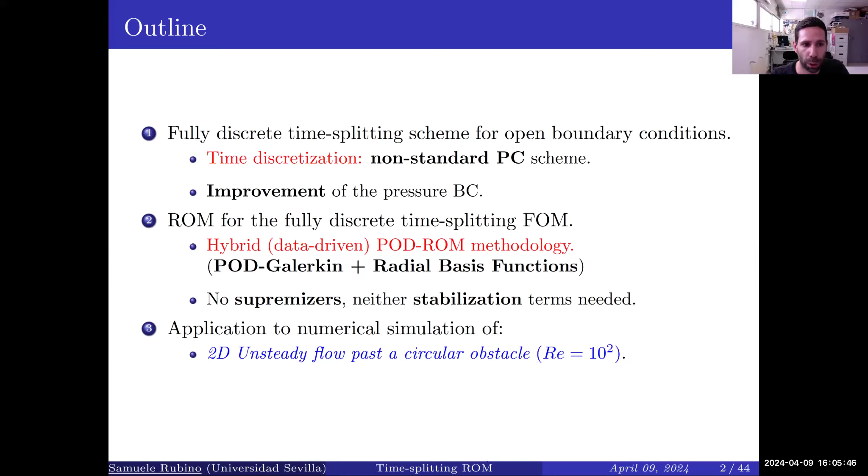We have, for instance, applications where we have the airflow around wind turbines and so on. And we will see how we get a really good computationally efficient algorithm by doing both time splitting at the full order model, in order to compute all the snapshots required in the offline phase, and also we will exploit basically then the computational efficiency with the reduced order model.

So here is the contents of the talk, and we start actually by giving a brief description of the Navier-Stokes equation model problem we are going to consider.

Let's consider omega as our bounded domain in dimension 2 or 3, with gamma, which is a Lipschitz boundary, and we are going to split it into two parts: a part in which we are imposing, let's say, inlet boundary condition, or where we are considering basically the wall of the domain, which is gamma D, where we actually impose Dirichlet condition, and the other part, which is gamma N, which is the one where we consider the open boundary condition. So you can see the incompressible Navier-Stokes equations with this mixed boundary condition, where as usual, U is the velocity field, P the pressure, nu the kinematic viscosity, and F the forcing term.

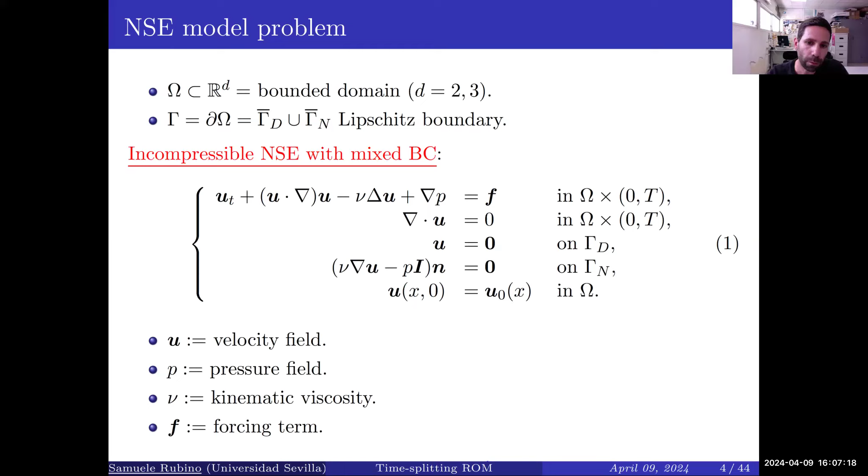For simplicity, we are considering just homogeneous Dirichlet boundary condition on gamma D, but it can be easily extended to the non-homogeneous case by a proper lifting technique.

First, we give the variational form of the continuous problem. By X we denote the velocity space, which is the H1 space with zero Dirichlet boundary condition on gamma D, and by L2 the pressure space. Here is the variational formulation, where parentheses denote the standard L2 inner product, and this symbol denotes the duality pairing between the velocity space and its dual.

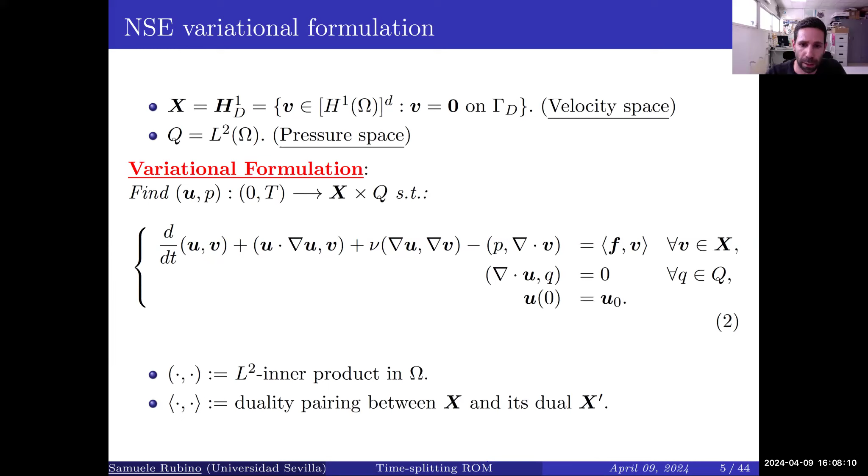Once we have this, we pass to treat the fully discrete full order model, focusing in particular on the time discretization.

Here comes the idea to consider a non-standard pressure correction schema for open boundary conditions, in order to get more precise results compared to the standard approach for pressure boundary conditions in case of open boundary, and also a better convergence order of the method compared to standard splitting schemas such as Chorin-Temam and so on.

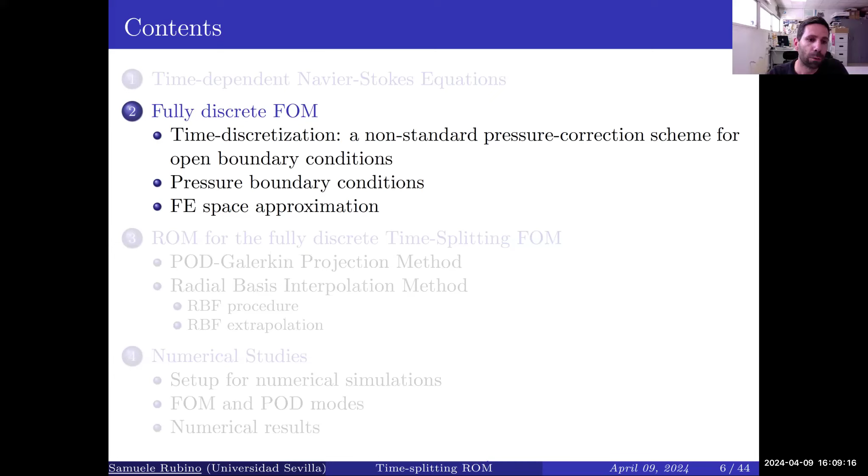In this part I will explain in detail how we treat this pressure boundary condition, and then we will get the fully discrete full order model by considering it in a finite element framework.

In order to start, we consider the semi-discrete in time version of the continuous problem. This is done for simplicity, to highlight just the pressure boundary condition we are going to use, and then we will pass to the fully discrete version of the algorithm.

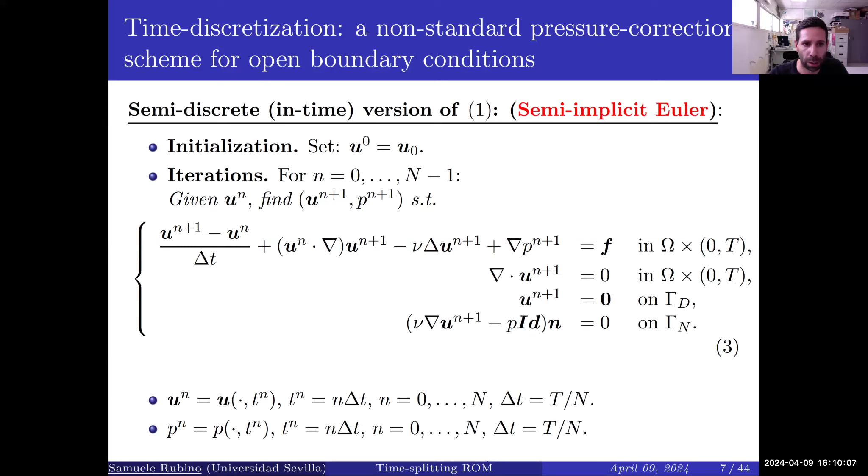In order to describe it, we are going to use a semi-implicit Euler scheme. Once we initialize the velocity condition, here is the description of the iteration in time, once we have considered a discretization of the time interval and so on.

This is the monolithic version of the problem, in which we couple both velocity and pressure. Now we are going to split this unknown.

In order to do it, we consider a pressure correction scheme. First, we compute a predicted velocity, which I call U tilde, by a convection diffusion problem. In step one we see the prediction diffusion problem for U tilde, the predicted velocity, which respects the homogeneous Dirichlet boundary condition gamma D, but for which we do not require that it is divergence zero.

Once we have computed U tilde using the previous pressure, in step two we are able to compute at the same time the corrected velocity and the pressure difference. In step two we consider a pressure continuity correction problem, in which the corrected velocity has divergence zero, but on gamma D satisfies just that U n plus 1 dot n is equal to zero. Finally, we can recover the pressure by the last simple formula.

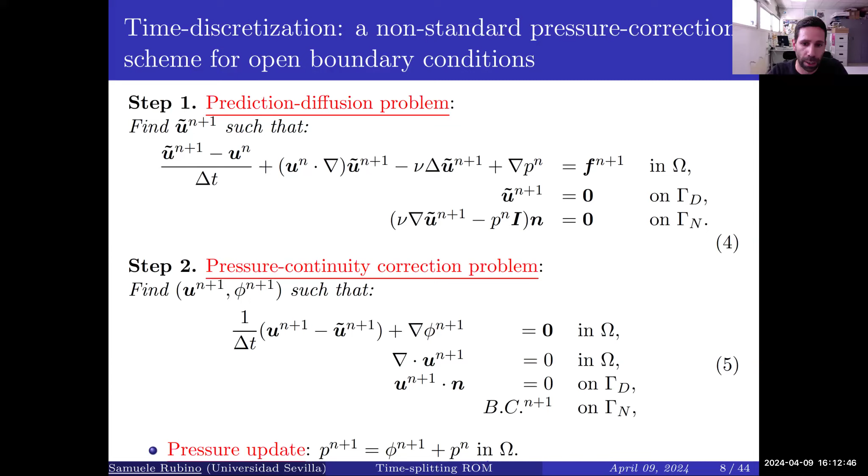That means P n plus 1 is equal to P n, and if we go on with this strategy, P n plus 1 is actually equal to the initialization of the pressure. But as we know, in the majority of cases this can cause numerical issues on the open boundary. So in this case we decided to go with an alternative strategy.

I will focus on this alternative. But before the detailed description of the pressure boundary condition on gamma N, step two can be seen, by its primal formulation, as a Poisson problem by just applying divergence to step two. So we actually get a Poisson problem for the pressure difference with this condition on gamma D, and with the condition on gamma N that I will go on to describe.

Finally, we can update both pressure and velocity as we see in equations 7 and 8.

So as I said, the strategy to complete or close this algorithm for problem 6 is to define correctly the boundary condition on gamma n.

For this, we have used the idea from a paper by Mejdi Azaïez and co-workers, published in JCP in 2011, where they treat in a finite volume framework the improvement of open and traction boundary conditions for Navier-Stokes time splitting methods, and have also done a thorough numerical investigation, both for academic tests, seeing the convergence order of the method, and applying it to more complex tests.

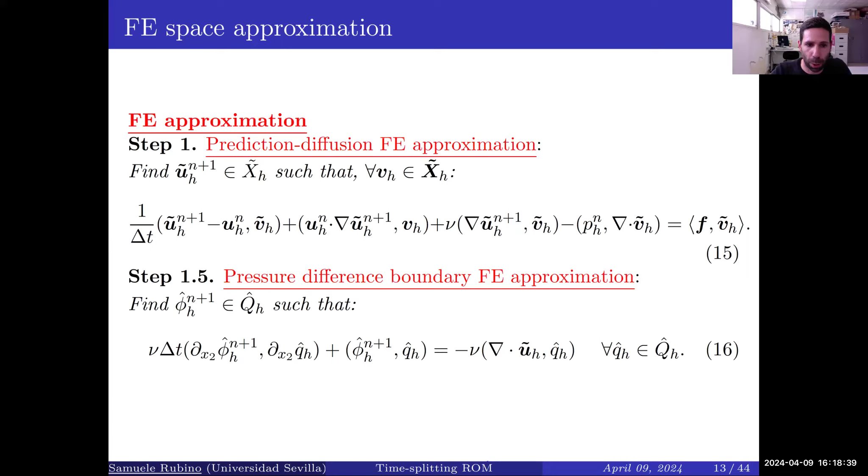Which is given here in 16, and then we impose it as a non-homogeneous Dirichlet boundary condition on step 2 in order to find the pressure difference through a pressure continuity correction finite element approximation.

So actually here we treat the pressure difference by a proper lifting technique. We have phi, which is a fluctuation around the value phi hat, which is the lifting given by the non-homogeneous Dirichlet boundary condition applied on gamma n, that we extend to the whole omega by constant values.

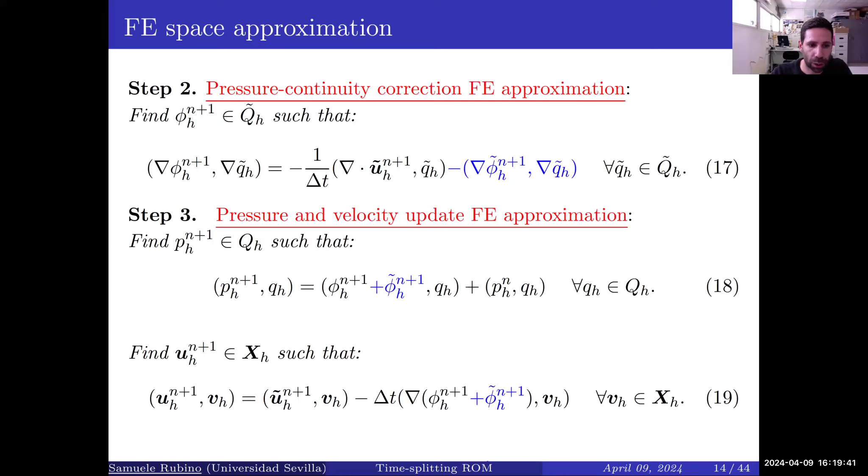Finally, on step 3, we are just recovering the right pressure and velocity. So now we have the description of the full order model.

As we will see with this treatment of the boundary condition, for instance in the numerical study we perform, when we have a flow going around an obstacle, we are not obliged to go very far from the obstacle in order to impose the boundary condition. We can use this condition for a reduced computational domain just around the obstacle, and this will give a computational gain in CPU time.

But this computational gain can be increased further by now considering the reduced order version of this fully discrete time splitting form.

As I said before, we pass both from an intrusive technique on one side, which consists of a POD Galerkin projection method, and we combine it with the data-driven method, which is based on radial basis interpolation.

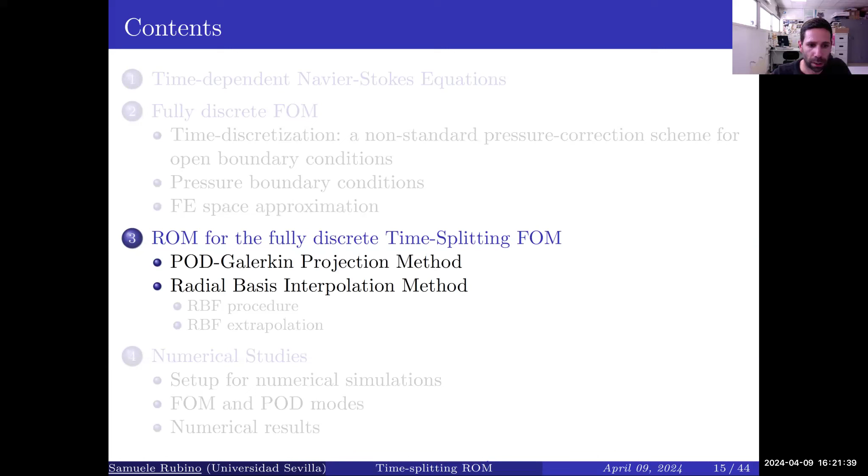So let's start with the ROM version of the fully discrete time splitting form. It is based on a POD-ROM methodology. In order to get an efficient ROM, we completely separate the offline and online decomposition. We finally end up with a hybrid POD-ROM, which is projection-based for the computation of prediction velocity and updating

the velocity and pressure, which are steps 1 and 3 I described before. On the other side, it's data-driven, let's say non-intrusive, for the computation of pressure boundary condition and consequently for pressure difference by means of RBF, which are steps 1/2 and 2 that I described before.

So here, as usual, we go with the ensemble of unknown snapshots, and thus with the construction of the POD basis. If in general we go just with velocity and pressure snapshots, for this method we have to go also with other sets of snapshots for the prediction velocity and also for the pressure difference.

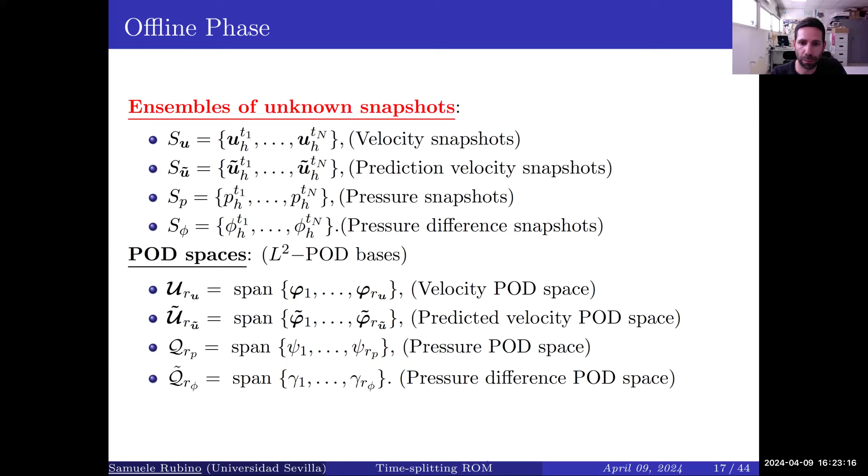And then we construct the corresponding POD spaces by using the L2 norm in this case for velocity, predicted velocity, pressure, and pressure difference. So we can see the ROM solution actually as the reduced approximation by considering simply a linear combination of the corresponding POD basis times the time varying coefficient for each field.

And thus the proposed POD-ROM, once we have the initialization, let's say by L2 projection, of the POD basis of velocity and pressure, then we solve step 1 by POD Galerkin projection. We consider the same variational form we had in the offline phase, and we project it on the POD-ROM basis for the predicted velocity, in the case of the prediction diffusion reduced order model.

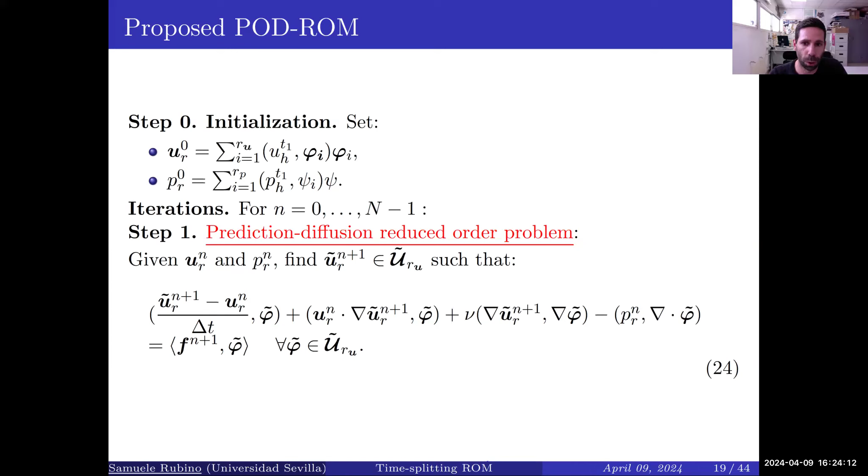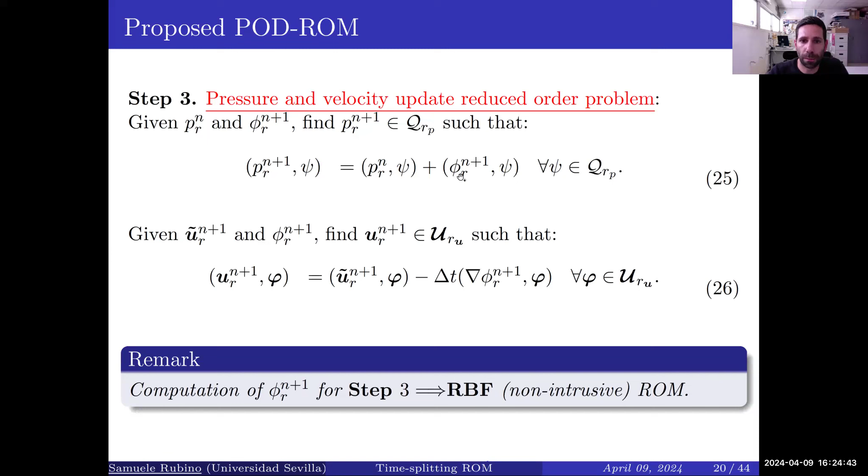And here I pass directly to step 3, which is the updating of pressure and velocity, by supposing that we have already computed the pressure difference given here by phi n+1. Later on, I will describe the radial basis function non-intrusive technique that we are going to use in order to compute this phi n+1.

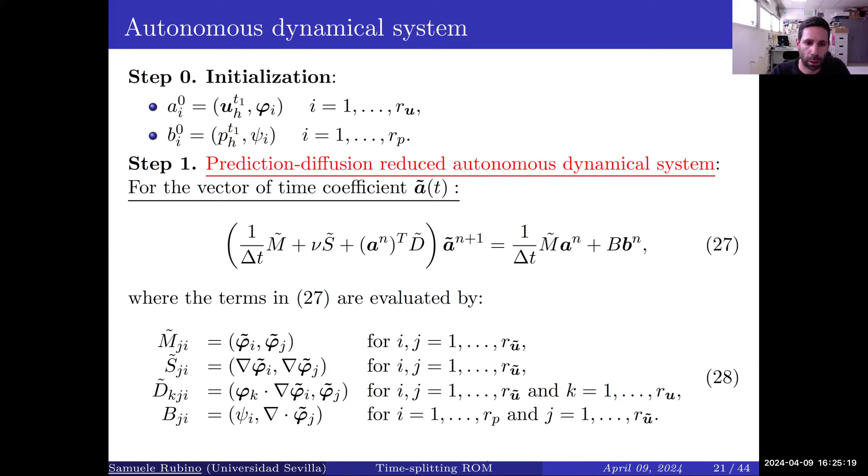So this is just the matrix form to which the system that I described before is reduced. We arrive actually at an autonomous dynamical system for the vector of time coefficients related to the predicted velocity, A tilde, in step 1 for the prediction diffusion reduced model. And here is the update of the time coefficient related to pressure and finally to the corrected

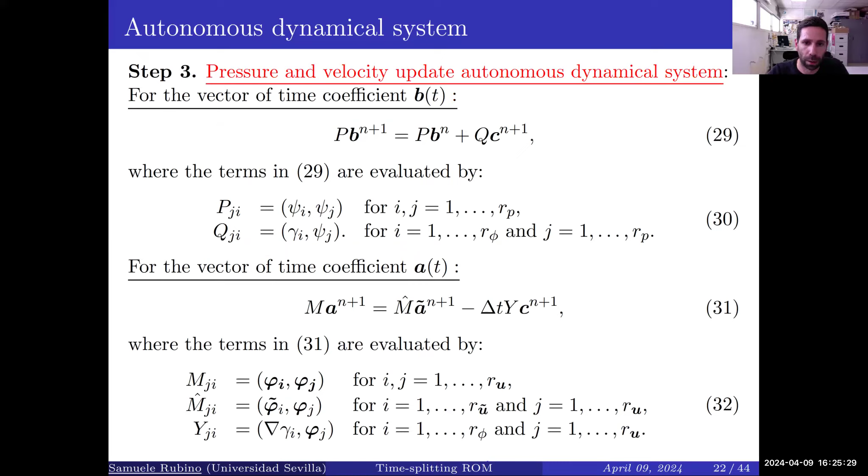velocity. But as we said, in order to arrive at this computation, we have to consider how we approximate the pressure difference that we are going to use in the time splitting reduced order technique.

As I said, we use an RBF strategy to approximate it. Again, we consider it as a linear combination of the associated POD basis times the time coefficient vector. And now the RBF is used in order to compute this time coefficient vector.

This is based basically on the fact that the ROM that we are going to consider has only time as parameter. But we can actually extend this kind of discretization also to the multi-parameter framework, in which we consider also some physical parameters and so on, as the Reynolds number.

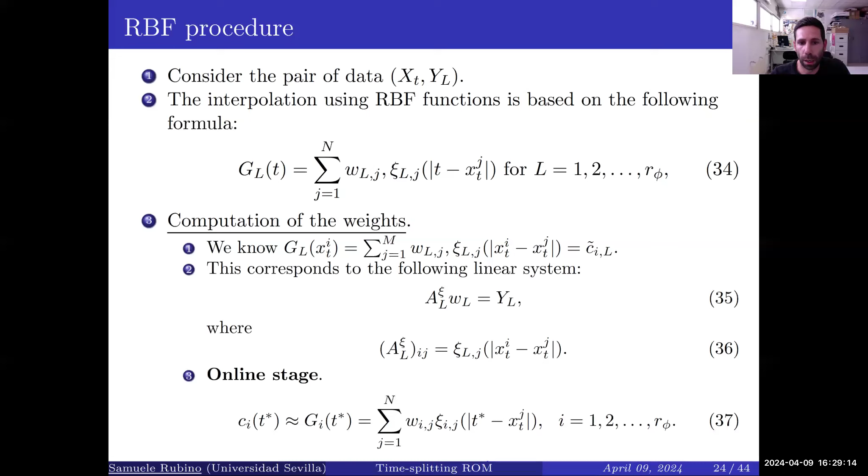Actually, this kind of RBF procedure, which is the standard one adapted here to our framework, doesn't give good results if we are going to perform time extrapolation. Imagine that you have a snapshot computed on a time interval, and what we want to do is see the temporal behavior of the reduced order model in time after this interval, for a time window which is larger with respect to the one in which we computed the snapshot.

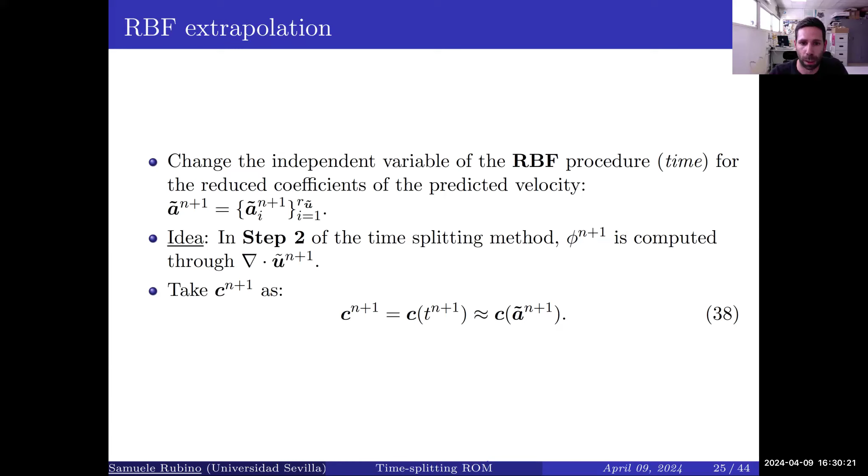So to adapt this technique to time extrapolation, what we are going to do is replace the independent variable of the RBF procedure, in our case time, treated as a parameter, by the coefficient of the predicted velocity. This comes from the idea that in step 2 of the time splitting method, the pressure difference is computed through the divergence of the predicted velocity. That's why the time coefficients related to the RBF procedure are approximated not explicitly by time, but by using the vector of time coefficients of the predicted velocity. This is an idea we adapted from a paper by Gianluigi and co-worker to our case.

Now we pass to the final part of the talk, where we actually see the performance, both on accuracy and efficiency, of the time splitting algorithm reduced order model that we proposed.

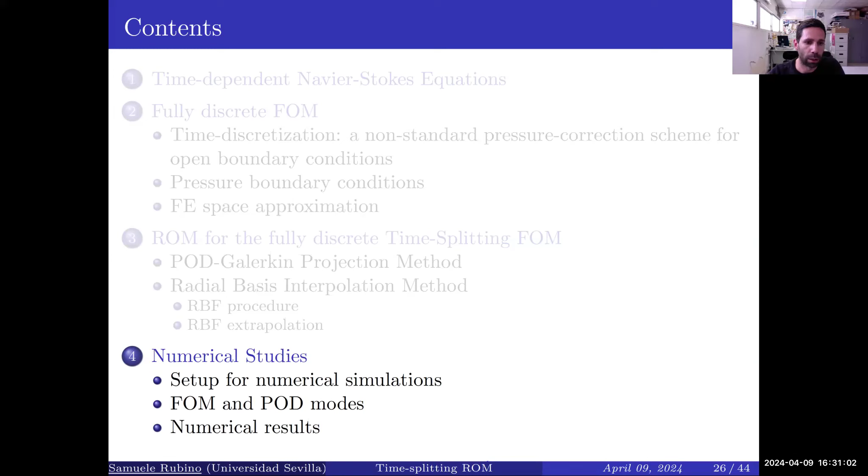First of all, we applied it to a 2D flow around cylinders. Here is the numerical setup for the simulation, which is the same I already considered in a paper with Julia Novo published in 2021 in the SIAM Journal on Numerical Analysis. Here is what we call the full spatial domain, our reference domain.

But then we will see that in order to compute the snapshots for the ROM, we can reduce this domain to a domain which is just around the obstacle. This is the whole domain for which we impose an inlet boundary condition, a parabolic profile as described here with these values. Then both on the cylinder and upper and lower wall, we impose homogeneous Dirichlet boundary conditions. And at the end, here is where we have open boundary conditions, treated as I described just before.

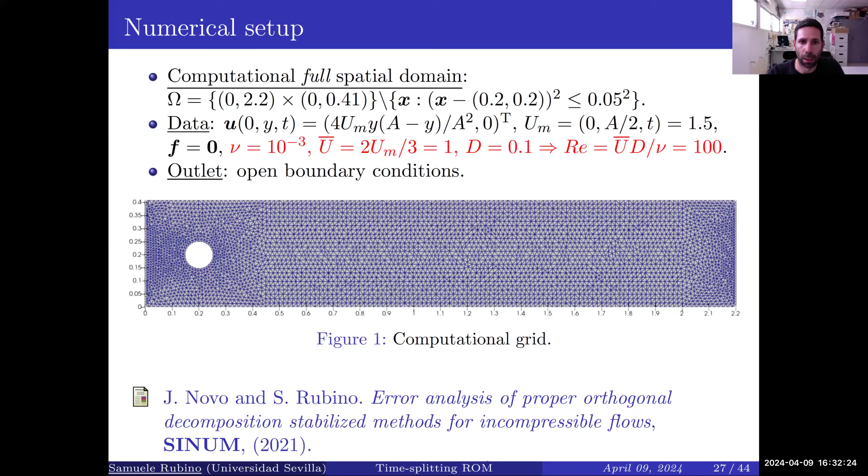As usual, the quantities of interest we are going to control are basically the kinetic energy and the drag and lift coefficients around the obstacle. To compute these last two quantities, we consider an integral formulation of these coefficients.

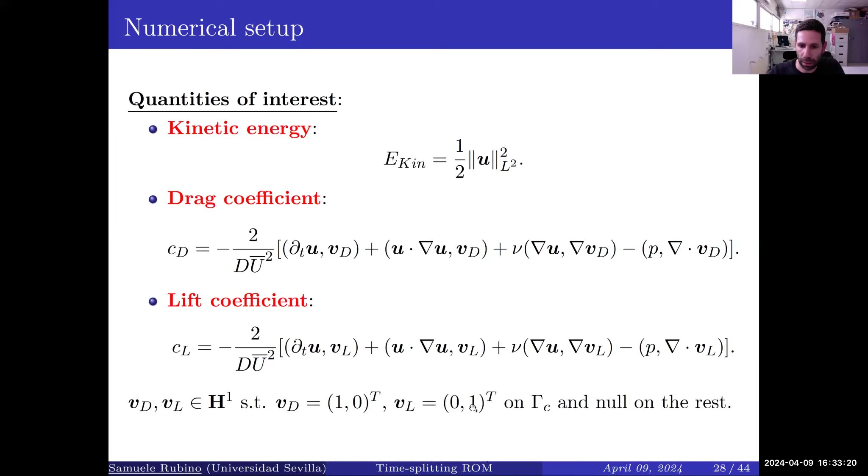Basically, in order to avoid numerical issues due to the discretization of the obstacle, since we are using a relatively coarse grid, it is based on these two integral formulas, where the test functions are described at the end of the slide.

So what we are going to accurately reproduce is the numerical solution of this test, both on the full domain, which is used in standard simulations of this kind of flow, but also if we reduce the computational domain, what we call this minimal domain. We will see how quantities such as the drag and lift coefficients are computed almost equally well for this last computational domain.

Also the full fields such as vorticity, pressure, and velocity are not disturbed by the imposition of the boundary condition here, even if we consider this reduced computational domain. This, of course, allows us to have reduced computing time when we compute snapshots. So here is the FOM setup and implementation, a space discretization for the full order model.

We use an Inf-Sup stable finite element pair for velocity and pressure, on a relatively coarse grid. The initial condition is flow at rest. The time discretization uses a semi-implicit BDF1 algorithm with this time step, and the implementation is performed with FreeFEM software.

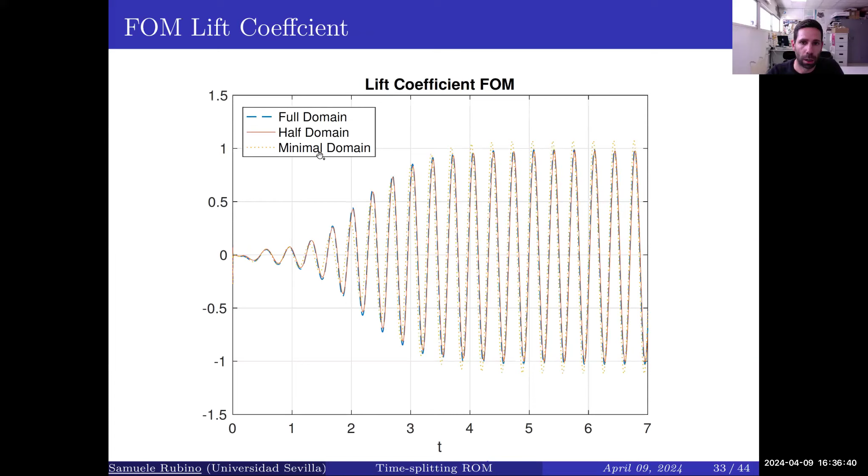That means the same simulation we can perform with the full domain can actually be performed with this restricted domain. So here I first give you a consideration on the CPU time, where you see the speed up for the FOM solution if we use the full, half, and minimal domain.

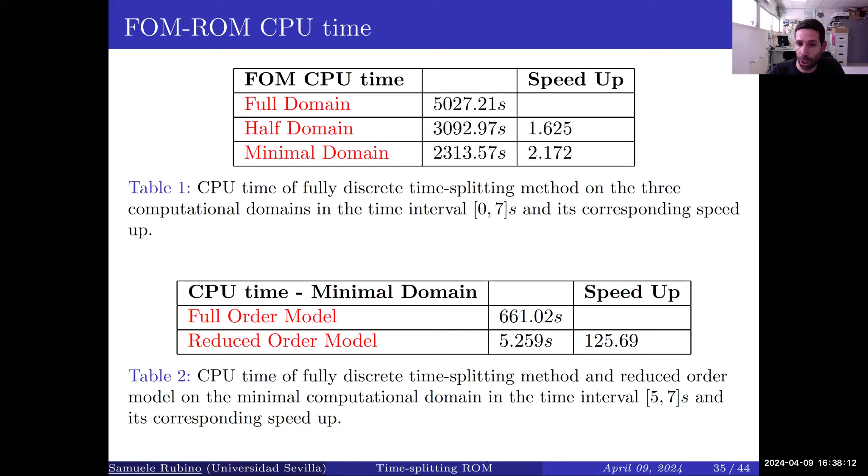And of course we choose to work with the minimal domain in order to compute the snapshots for the reduced order model. At this point, if we compare the CPU time between the full order model and the reduced order model, just on the time interval where the flow is already developed, and on the minimal domain, we have up to 2 orders of magnitude of decrease in computational time.

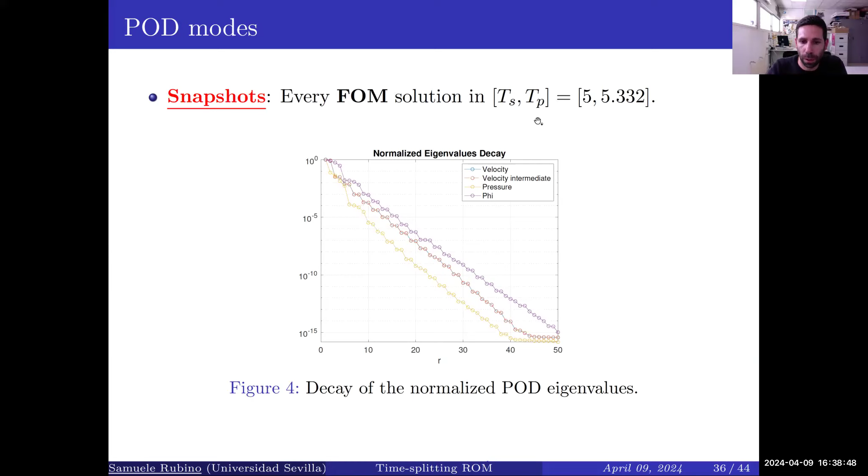So in order to give quantitative results on the comparison between ROM and FOM, here is how we compute the snapshots. We take every FOM solution just on one period of evolution of the flow, and then we try to extend the reduced order model for a larger time interval up to 7 seconds. So here is the decay of the normalized POD eigenvalues for all the unknown fields.

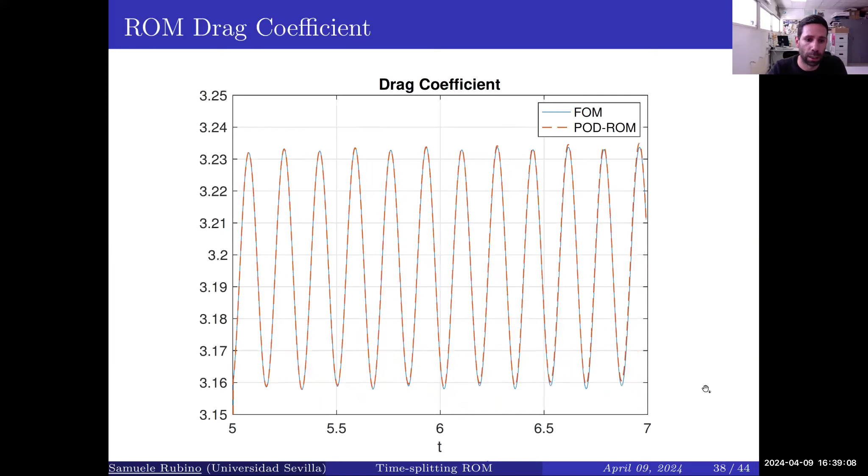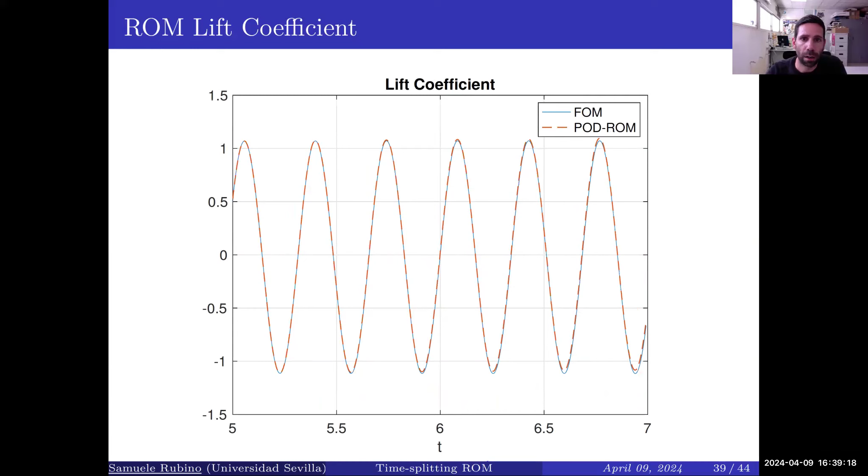And for the lift, we have 10 to the power minus 2, that is a 1% error, if we consider a sufficient number of basis functions for the flow fields.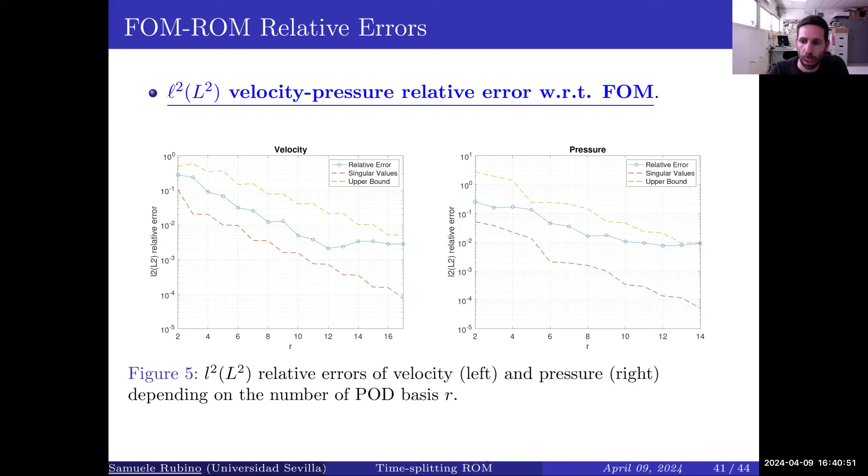And for the velocity and pressure, we can see here the decay again with respect to the number of POD bases of the relative error, both for velocity on the left and pressure on the right. So we have that velocity gets almost a 10 to the power minus 3 error if we consider a sufficient number of POD modes. And the error for pressure is up to 10 to the power minus 2. So again, we are below 1% error with respect to the full order model.

So we consider this result as reasonably accurate, and it gives an efficient computation not only of local quantities of interest, such as drag coefficient and lift coefficient, but also of the full flow field, such as velocity, pressure, and vorticity.

And we have seen that, considering also in the finite element framework this reduced computational domain, thanks to the application of the particular pressure boundary condition we applied, does not imply distortion of the flow vorticity field around the obstacle, which means that we have hope that this is a good strategy, for instance, in order to compute in real applications flows such as the wind flow around wind turbines.

And we have seen that we didn't need to use the supremizer technique at the ROM level. Neither stabilization terms are needed, both offline and online.

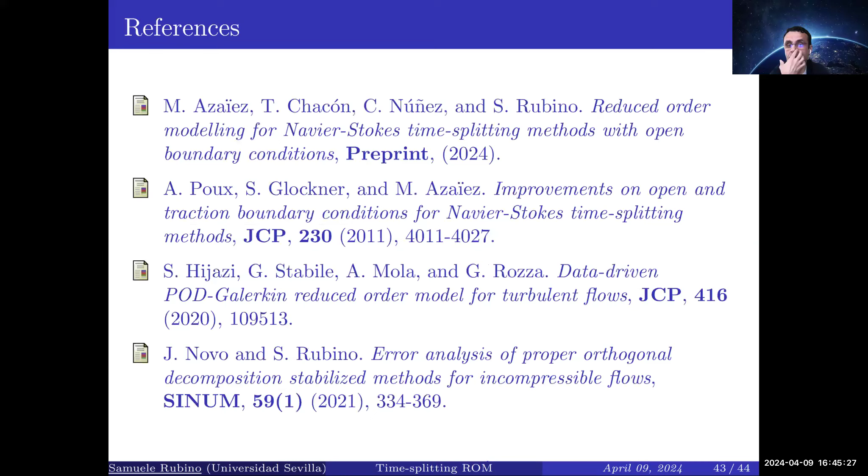So I liked what you said maybe towards the end, a couple of slides back, slide 42 or 43. So if I understand correctly, time splitting does provide accurate and efficient computation of the lift and drag coefficients, and you can reduce the computational domain, and then you don't need supremizers and stabilization, right? But I have to say, my question is, how about the monolithic ROM?

At the full order model level, time splitting is very popular, but I think the main reason there is that you split the problem into smaller problems, and then it's more efficient. So I'm just wondering, I would say it's important—maybe if you have a low dimensional ROM, it's not that critical to split a 10-dimensional ROM into 5+5. But I think as we move to higher and higher dimensional problems, like millions and billions of degrees of freedom, the reduced order modeling will also have a similar issue.

And in that case, it might even be beneficial at the ROM level to take the monolithic ROM and then split it into projections like you did, so we use time splitting. So it was not a question, it was more of a comment. I think maybe now it's not apparent, right?

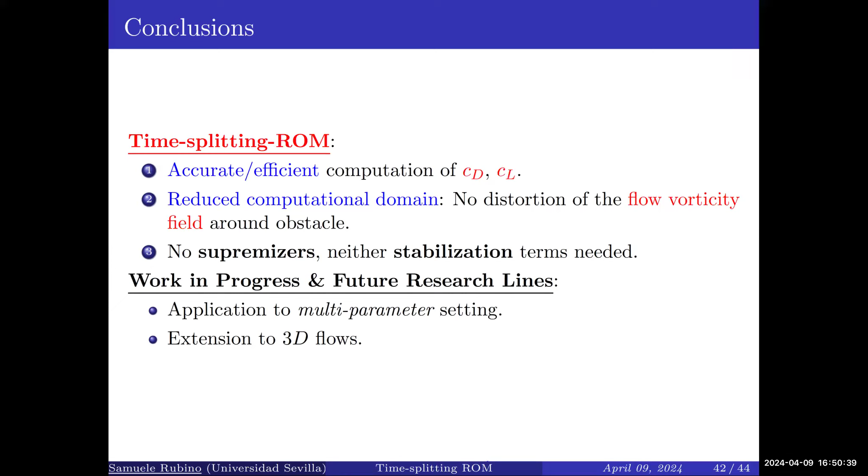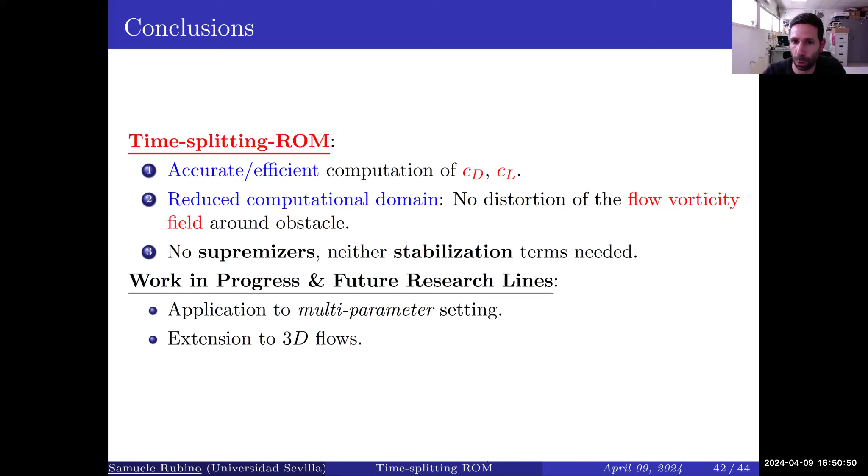Okay, so when we started to consider the time evolution of the ROM outside the window where we computed the snapshot - if you remain in the same time interval where you computed the snapshot, it's all okay. But if we go very far from this time interval, that's when you start to see that the standard RBF approach starts to give some numerical issues, for instance the increase of kinetic energy in the POD solution. With the modification, you are able to maintain the solution stable in time, so you do not see any increase of the kinetic energy.

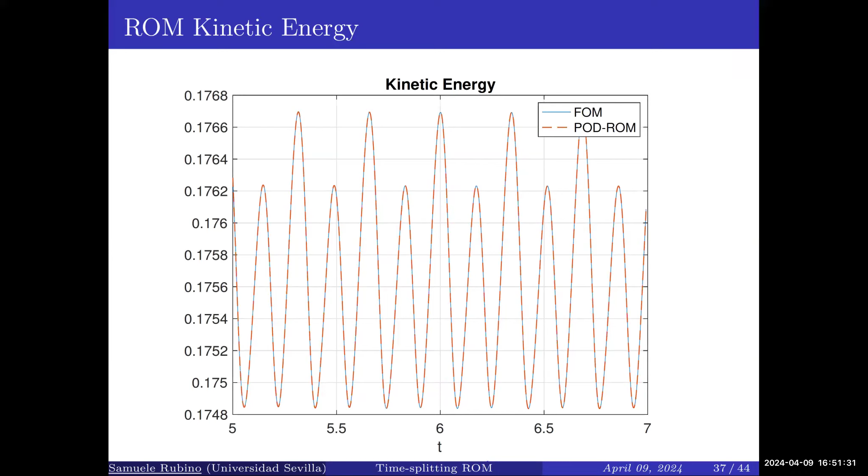I see, so there's some discrepancy, but it will remain stable further in time. Yeah. Okay. Yeah, thank you. Thank you.

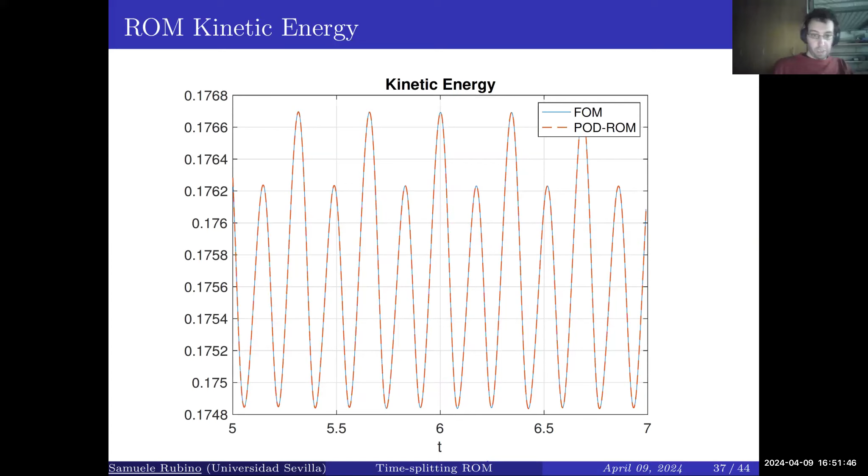And any other further comments or questions? Yeah, maybe I can ask a question. I think it was on slide number 10 or 11 where you introduced the modified boundary conditions. Yeah, for the pressure. Yeah.

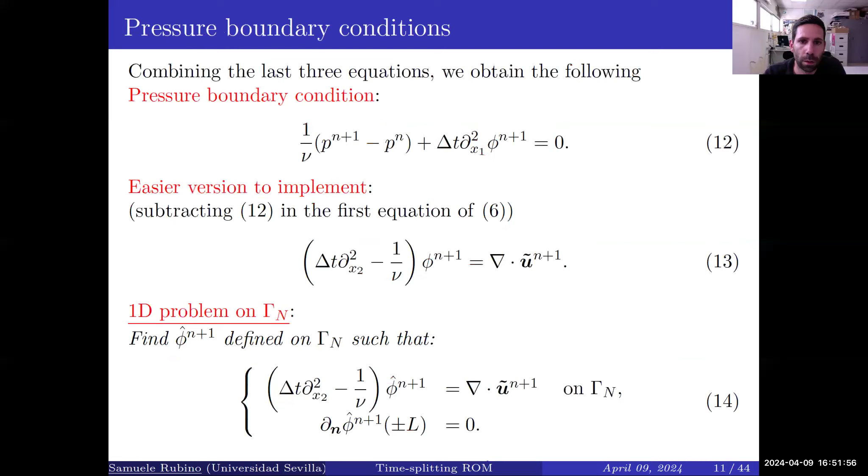So here is where we start. What I didn't fully get is this derivation on x1. So you choose x1 rather than x2 or whatever else because you knew a priori that the outflow boundary was vertical. So my question would be, would there be a way to generalize this to an outflow boundary which has another shape, not like a vertical line or a horizontal line?

Yeah, okay, so I think it can be done maybe by splitting the derivation on the basis you have on this shape. So maybe you have to work or combine the different directions of the basis. But I think we didn't try it. I don't know if it can be possible, but I think this could be the way to go. Yeah, the way to go.

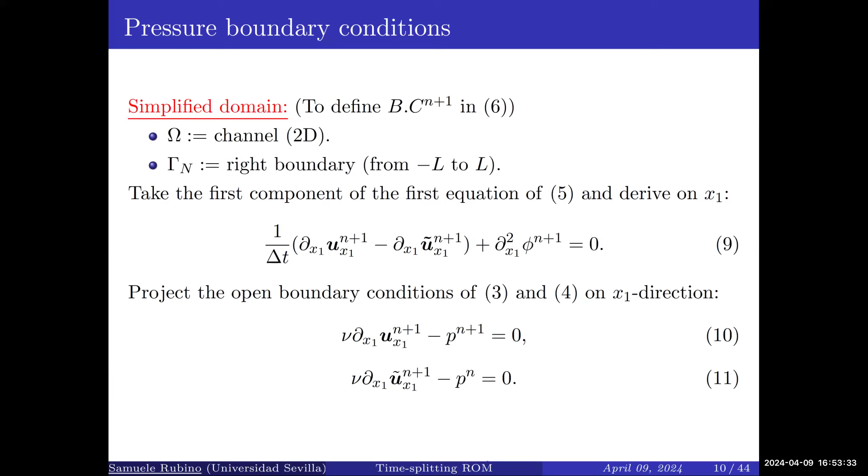Okay, if I can give a comment, not for the reduced model but for the full model, in the paper cited by Samuele we provided generalization to general coordinates. We went to the local basis, which is made by tangential and normal, and wrote the same technique - we can extend it to any curved outflow boundary condition. But I have no idea how it would work with respect to the reduced model. It was only formally done, we didn't apply it really with a numerical example.

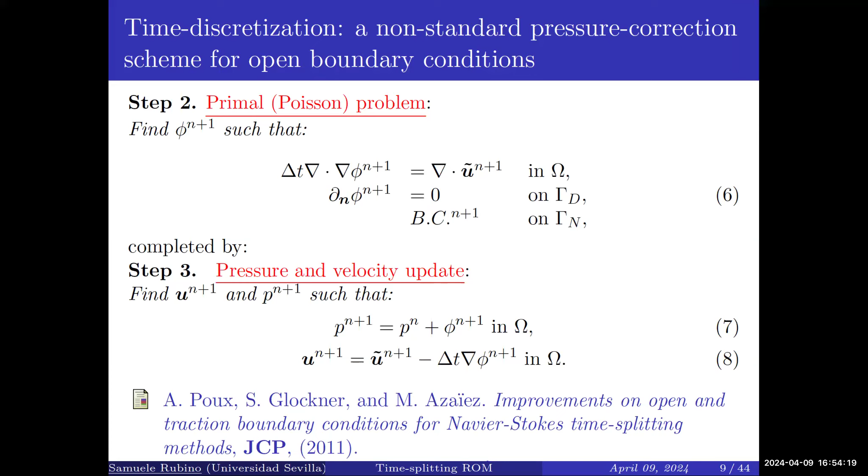It was just because the reviewer asked the same question as you, so we said okay, let's make it local, and we did it, but we never applied it to a concrete problem. 2011 was before my time, so I definitely wasn't a reviewer. Okay, thanks. Okay.